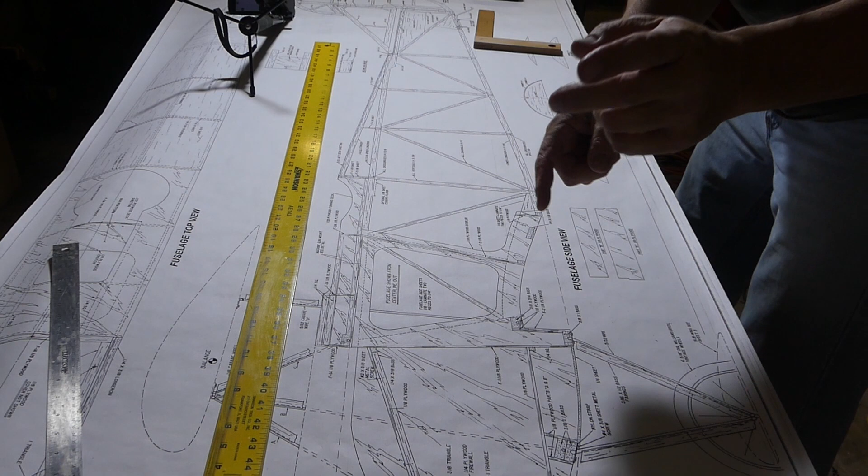All right, the reason why I've got this set up out here the way I do is because I want to show you what I had to do for measurements up front to translate everything to the very back of the airplane. This is the fun part, guys.

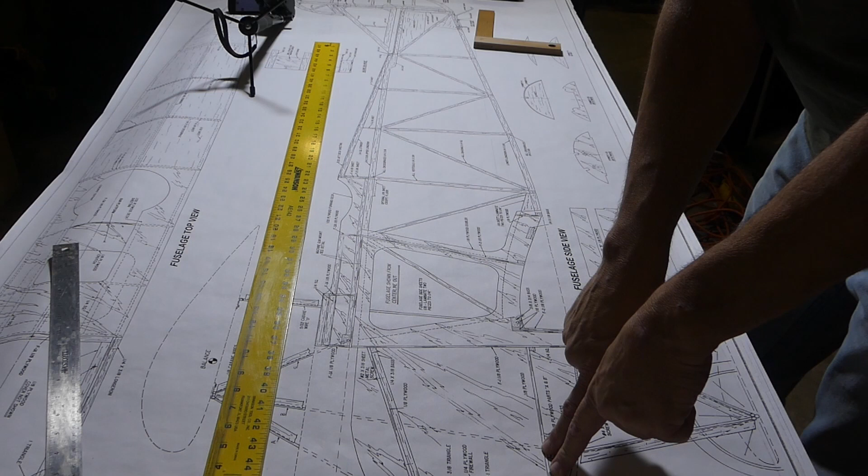All right, what I had to do is come on in and find at least one indicator line, so I knew which way we were working it, pretty much when the plane is level at 0 degrees. And this is where it's going to get fun.

It's what I needed to do to get a true measurement on the tail of the airplane. So what I was able to do is come on in. It looked like the line coming across the top here, up on the top of the, whatever you want to call this part, the cheek, up front by the firewall.

This looked like it was parallel with this line down here, which is that bottom plate inside the front that the firewall pretty much gets attached to.

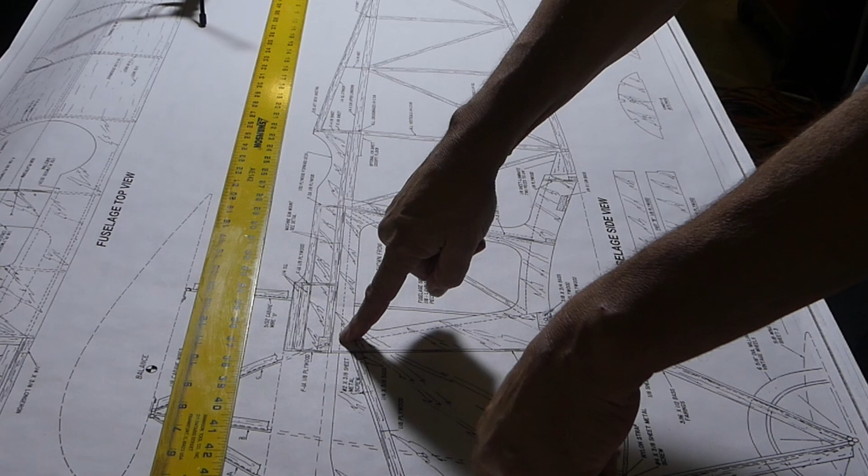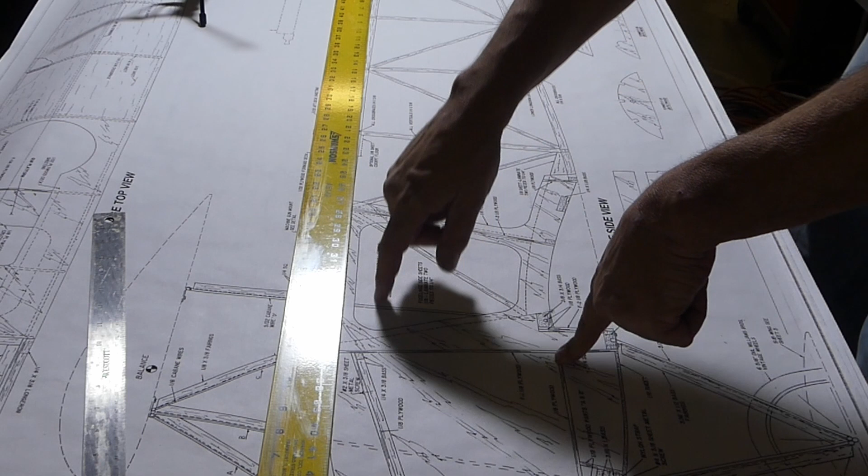So what I did is I came in with a big long ruler, this is my 4-foot yardstick, for those that have heard me call it that before. So we came in, drew a line across, came over, and yes, I had to jump back to metric again because that's the way it works better. Came in, measured from this line down, 185 millimeters in the front, 185 in the back. So we knew that this long line and this short one down here, that this was true to the length of the fuselage. So that's going to be really good.

What I'm going to have to do is come down here to get the angle of this. So what I did, the other part, was because this right here, and I don't know if you're going to be able to see it...

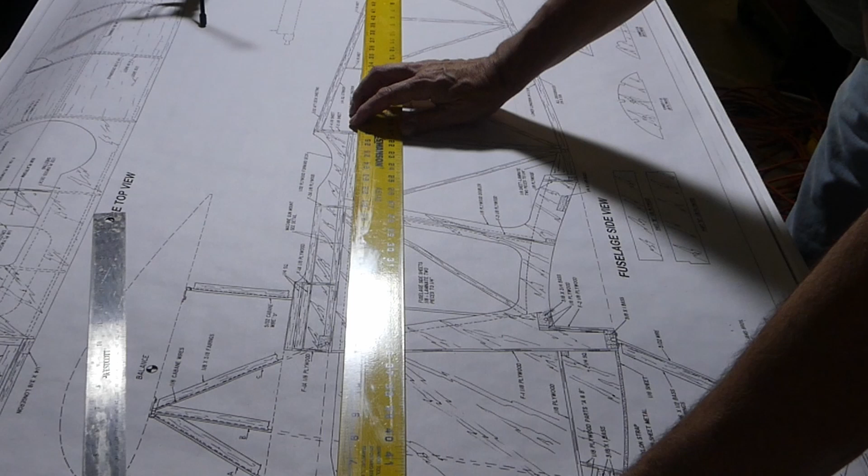I'm going to try to do it here. I'll set it up this way. It might be easier for you to see on the camera.

Right here is when this line starts to disappear below, and you can see how the 1/4 inch by 3/8 longeron comes in and disappears. So we know right from here it starts sloping down towards the tail.

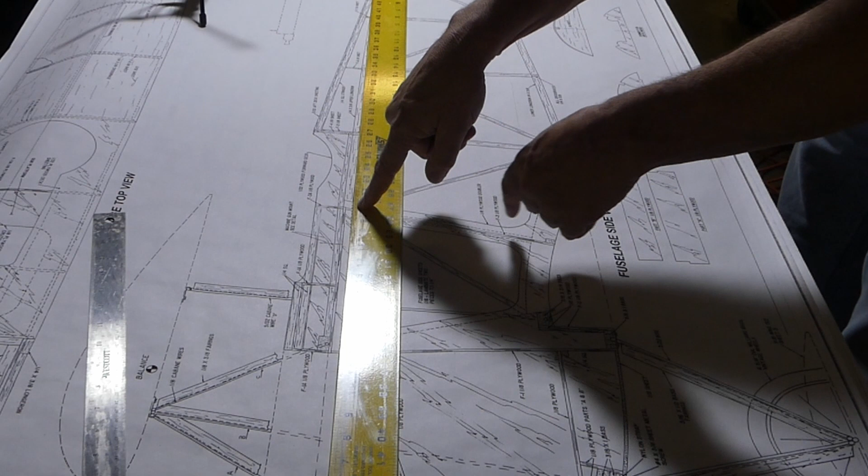Right here is where I made a mark. I came down and measured 185 millimeters, made a little crosshatch right here, where I knew that would be a good place to start.

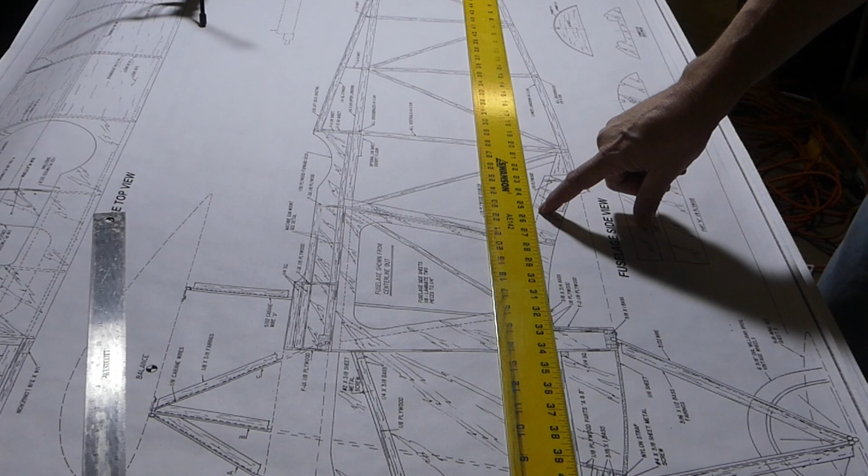I came in with my straight edge, and right from the top all the way out to where this point is, it's true in line with this lower piece with the 1/8 inch ply.

So from there I just started doing some dashed lines down so I can continue to transfer down. And when I came all the way back here by the end of the fuselage, I went ahead and made some more marks here on the paper.

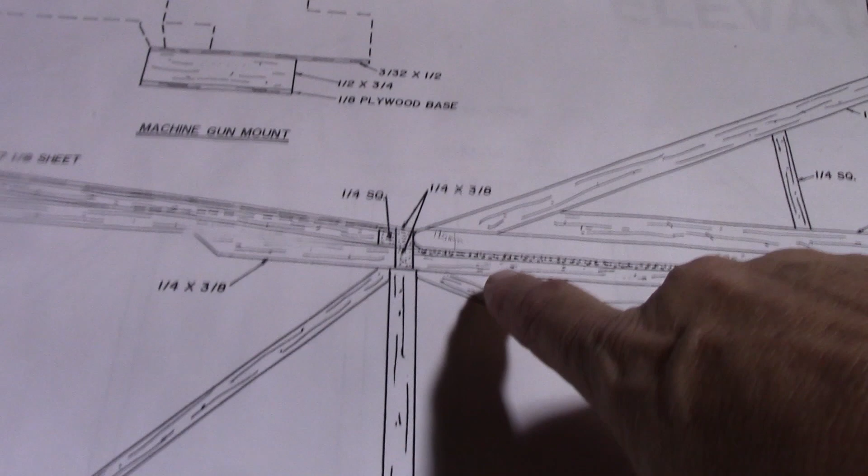So I've got one here and here, and then from here all the way up to the leading edge of the horizontal stabilizer was 125 millimeters. Came back from this line all the way up to the trailing edge of the horizontal stabilizer, 113 millimeters. So rise over run came out that this was at 2.75 degrees.

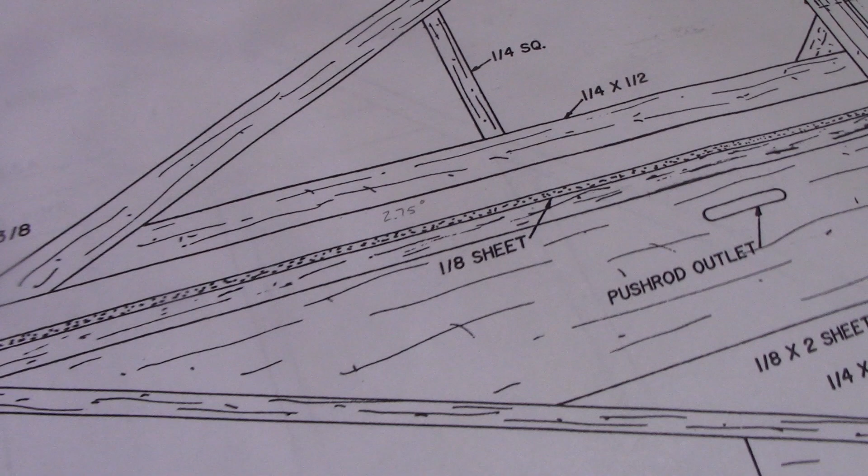This is stuff that when I look at plans, I have to come in and measure, just because, yeah, that's what you get to do.

All right, so we went ahead and grabbed the smart level, went inside here, and I will do it. You're just gonna have to trust me on this one.

We are all powered on, and I'm gonna come in and do a reset on it. And that should say 0 degrees, and there's no way you're going to be able to see that, but it does say 0 degrees. So we're at 0.0.

And that is my reference point. This is what I did on the plans outside. So this is what we're going to use back here.

And we come in and lay that down. I don't know how well you can see it. There we go, 3.4 degrees.

So it was 2.75 out there, 3.4 in here. Now what that's really showing me is that nobody was paying very close attention when they were putting this fuselage together.

I might be okay with that, and the reason why is because you don't know how well the tail is going to ride under flight.

The 3rd scale Taylorcraft that I built, that great big orange monster, when I got that one, it was a set of Bob Nellis plans, and people's biggest complaint was that the plane climbed viciously at higher throttle settings. So the faster you went, the more it just pitched the nose up.

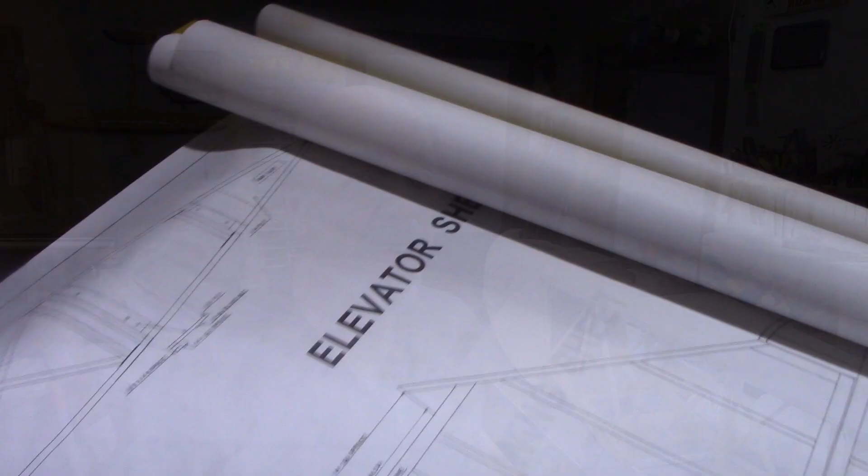So what I did was I got another set of plans out, because it's a set of plans I had since February of 2006. All right, so let me go ahead and show you these plans. These are Jerry Behrens... I'm going to say it's Behrens, B-E-H-R-A-N or R-E-N, like Jimmy Behrens set of plans.

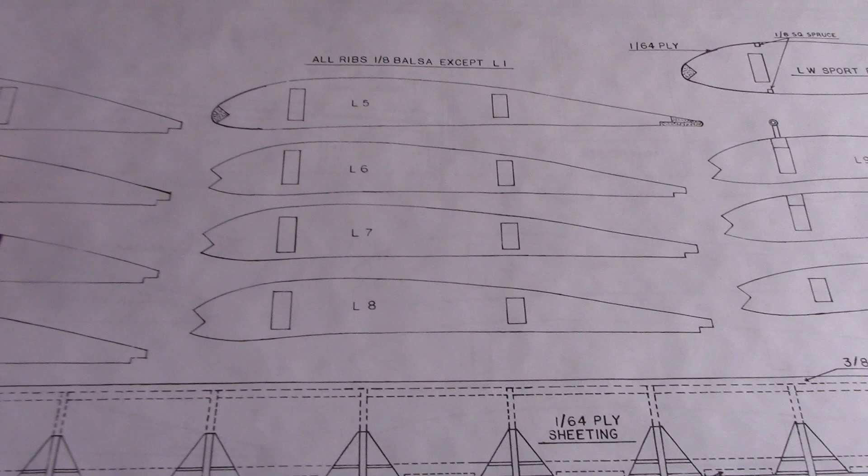And this is his quarter scale Fokker. And as you can see, the wings on this one, we've got true ribs, we've got undercamber, and it's a box rib. This was a plane I was going to build years ago, never did. And yeah, I would not have bought a Balsa USA if I was going to build one from a set of plans - this was going to be the one. It's just the Balsa USA one fell into my hands free of charge, so it was kind of a tough call not to say, yeah, I'll take it.

You're probably used to this view because we get to do it all over again. So what I did is I came in, found out that this set of plans doesn't have a motor mount built in. The way that this one was set up, there was no floor that the motor can attach to, or the firewall attached to - it just attaches to the sides. So what we're going to do with this one, at least they give us a datum line down the middle.

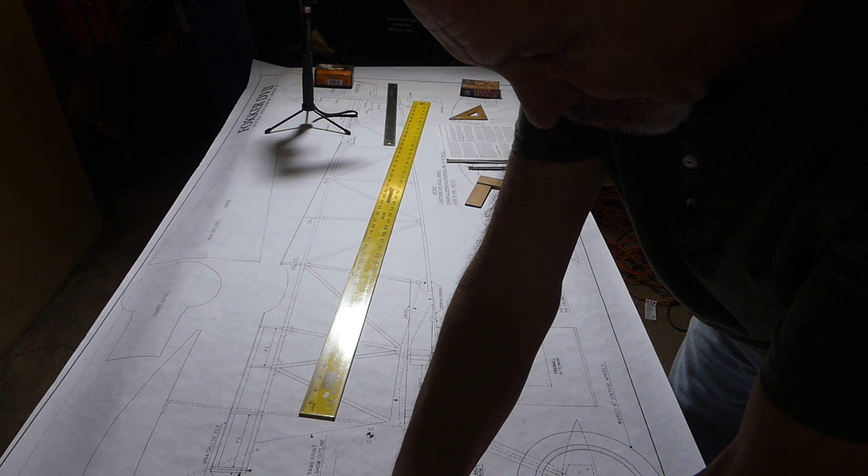And you probably can't see it through that camera, so you're just going to have to trust me on this one. All right, we do have a solid line going down the middle, at least that's what it appears to be. Right above that is going to be the thrust line set up for the firewall, and you're probably looking at 1 to 2 degrees - I'm going to say it's probably closer to 1 degree on the firewall.

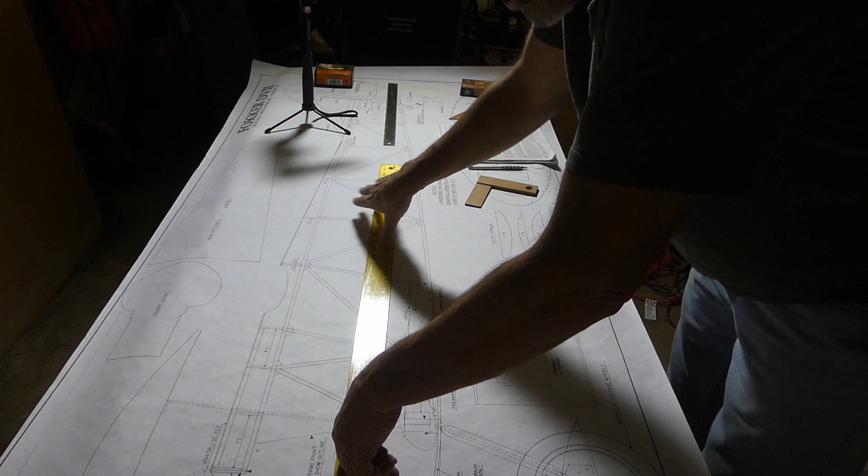So we're going to go ahead and take our straight edge, line this up on the line. Now let's see if there's somewhere up on top here that we can use for measurement, so that way we can reference this line with another part of the airplane, because the only other option is going to be on pretty much the tail end of the aircraft, and you got to hope that the rudder is going to be at 90 degrees to this line up front. So we'll find out. But because I'm going to edge my way down there, I just want to take a couple measurements here in the middle just to see if we're going to get the same numbers.

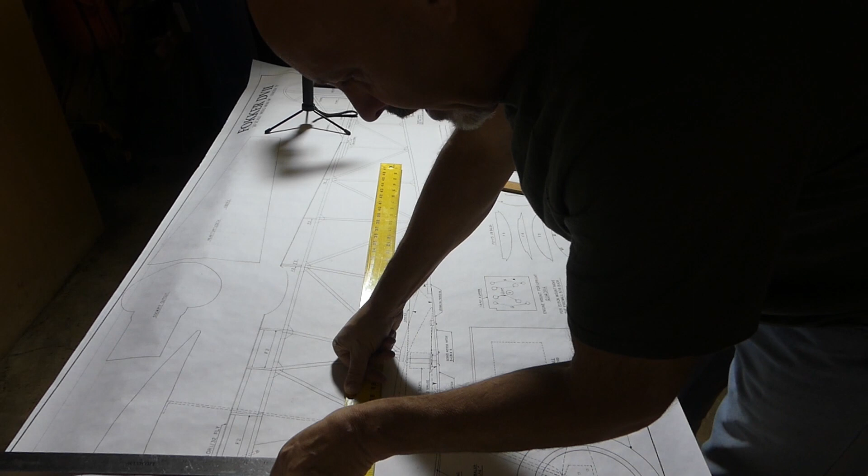Because before, right behind the cockpit was where the Balsa USA angled down, so I'm kind of hoping we're going to be good to this mark back here. So as we go up front, let's get back to our metric side of life here. We are coming in at 110 millimeters. Now as we come all the way back to here, we are at pretty much 111 and a half.

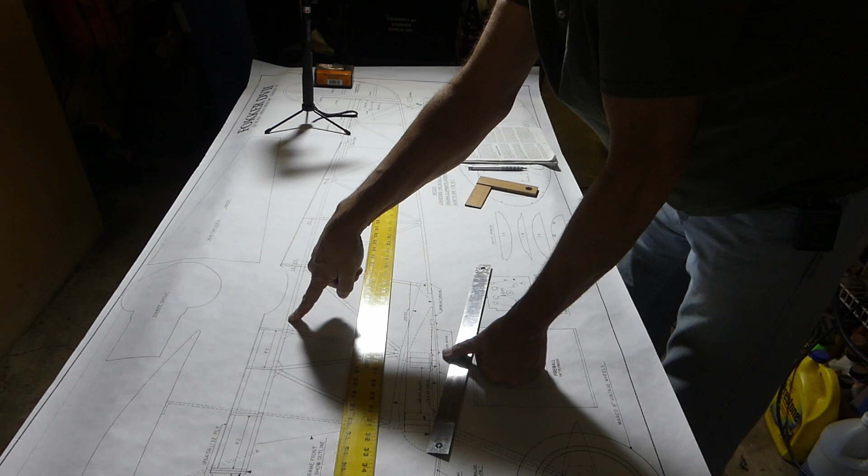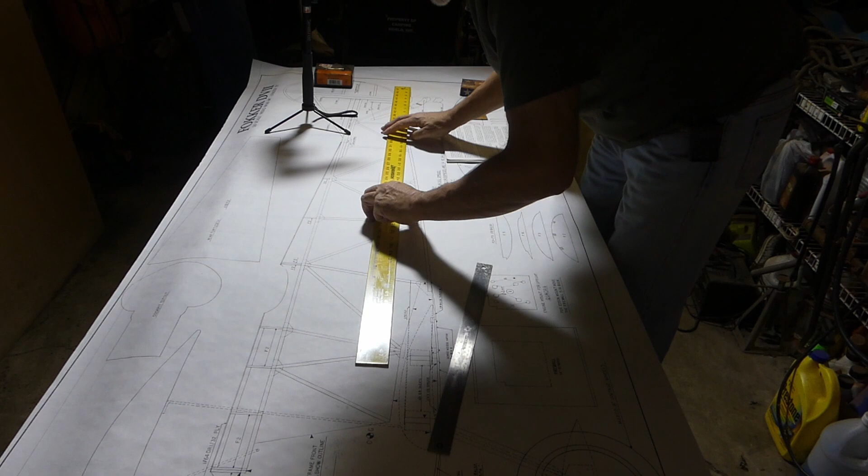So this is not true to the top of this right here, or to the bottom of it. So the best thing for us to do is just go ahead, and we're going to assume at the moment that this line up here is straight. So I'm just going to come in, just draw a couple more lines down here. And then we'll slide this down, and as we come down here, we'll line these back up again.

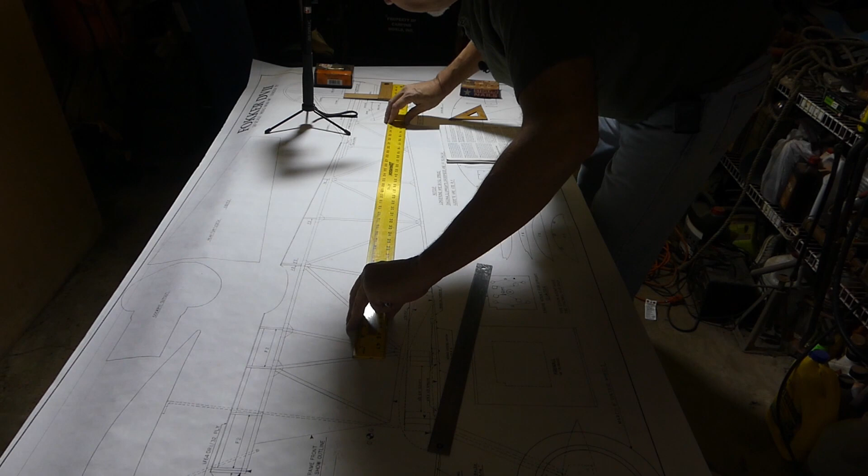And then as we get to the back right here, we will find out - and I wish we had better light down here, because we really don't. I'm going to see if I can get another light, just so that you can kind of see what I'm working with down here. So if you come on in and you can see this line, that's pretty close to true, so I'm okay with that.

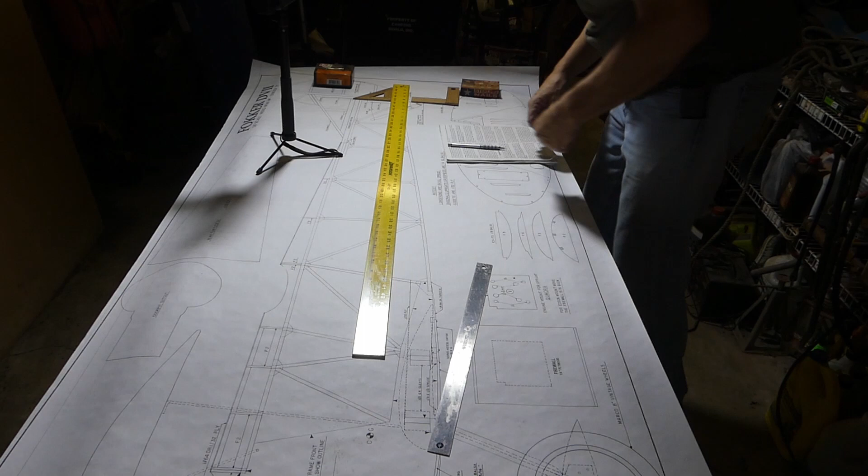So let's just go ahead, we're going to say that the rear part of the fuselage is true. So from that standpoint, next on our list of tricks, let's go ahead and make a measurement from the location of our straight edge up to the bottom. Or let's see, let's go with the top. All right, so up in the front, we're at 109 millimeter.

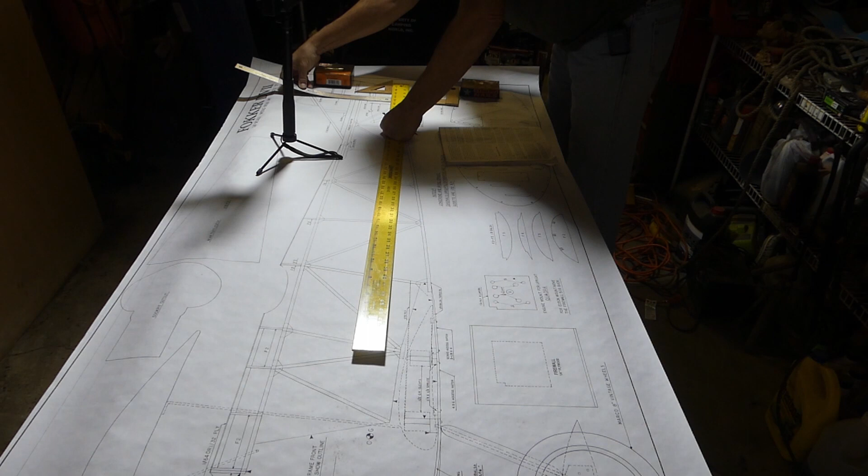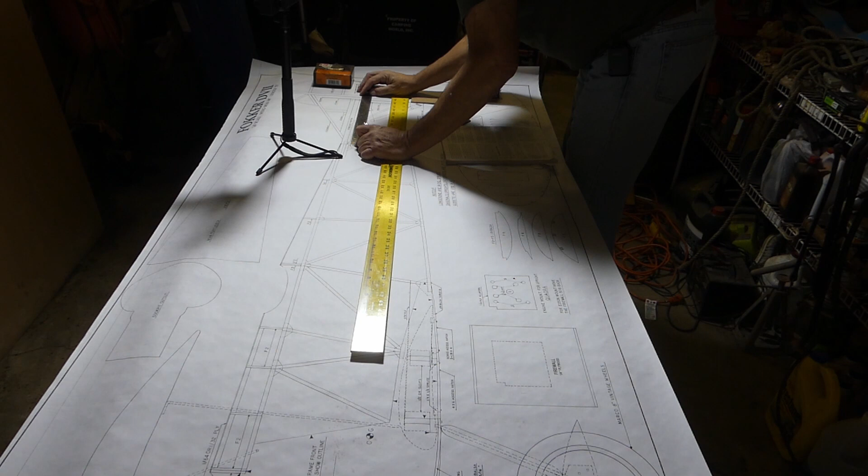And then in the back, we are at 106 millimeters. Now the distance that we're traveling, so we're 109 and 106, and we're actually coming back 309 millimeters, with a change in rise of 3 millimeters. So it's not going to be a very high angle of attack. Let's head back up into the shop and get it figured out.

So then the question is, when you see that much difference on the tail of a Fokker D7, it all has to do with the angle of attack of the wings. That's going to be the biggest factor in how to take care of it, because they want you to have 0 on the bottom, 0 on the top. On my Classic Sport Bipe, the Kristen Special, that's 0 at the bottom, -2 negative incidence at the front, up on the top. That's what I needed to get rid of the problem people are having with this.

I can't find anything through any forum, RC groups, where people have come to some kind of consensus on where to get things measured at. I've seen people where they say theirs flies great, and then other people say they have to throw a whole bunch of down elevator in just to get it so its speed doesn't continue to climb up. You're raising the tail up.